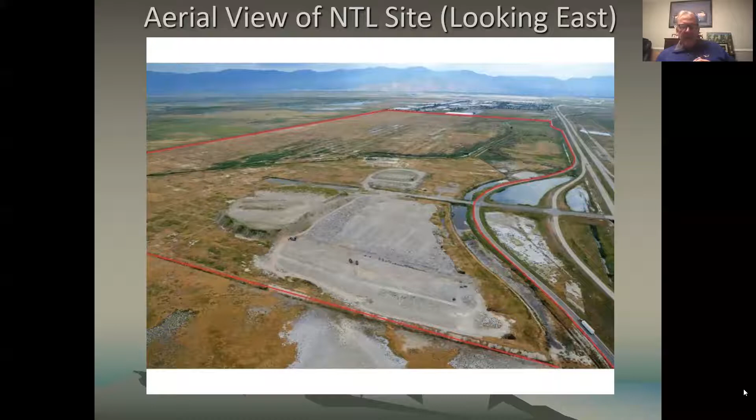To the left of that slide, which would be the northern part of the property, that red line aligns with 700 North. So that gives you a little bit of perspective of how large the landfill is and where it is. If you go to the next slide. Okay. As I mentioned before, the landfill was operated by Salt Lake City as a municipal waste landfill.

When you think about this landfill, how it operated, it was not like a landfill operates today where it's 50 feet high. This was what's called a trench landfill. So these were just trenches that were dug with a backhoe or a drag line. So they would dig down a certain amount of feet. When they got to that depth, they would then place the waste in the trench, and then they would fill it back with some of the soil that they had on top. So there was never a cap put on the landfill.

And if you look at this graph, you can see the areas in which the waste was placed. So area 1, which will coincide with our phase 1, was put in place in 1959 to 1963. That's when it operated. You can also see that the orientation of the cells in that area go north and south. And if you look at the area to the north of that, they go east and west. So you can see how the landfill was developed. It basically went from the east side of the landfill and worked its way across to the west, only to return to the northern portion, which is area 6, in the late 1970s to close out the landfill.

As we move from east to west, the waste gets deeper. The waste in area 1 is between 2 and 5 feet deep. When we get to area 5, the waste is in excess of 10 to 12 feet deep. So as you move across the landfill, the waste cells get a little deeper. And that's just a function of the way in which Salt Lake City operated, because as they went further along, they were looking for more capacity. So they dug those trenches a little bit lower. Okay. So now you have a sense of how the landfill was developed.

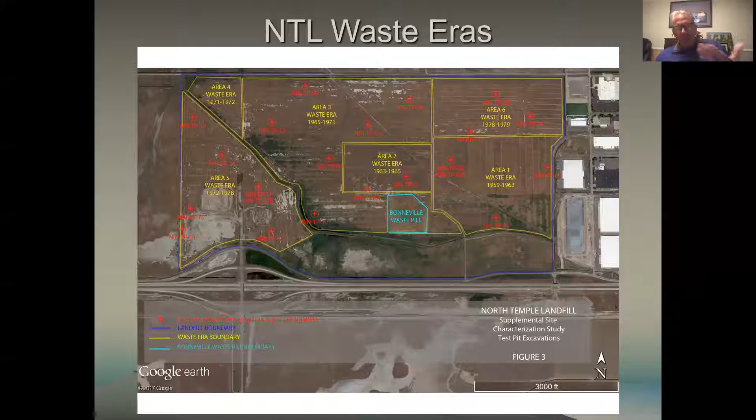And that's kind of the same situation that we're looking to do here as we move forward. It's basically consolidating this waste that we have across the entire landfill into a series of repositories that'll concentrate that waste on the North Temple landfill site. So if we move to the next slide, what we see here is what we refer to as phase 1. So as we move forward with the landfill, we're going to remediate it in phases. This is our phase 1 boundary. It's a total of 175 acres, but only 130 or so have any waste in them.

And if you see the southern portion of phase 1, there's a brown marker that goes across there and makes its way across the property. That's the Brighton Canal. That is an irrigation canal operated by Suburban Land Reserve. Its only function today is to bring water from well water out to the duck clubs. That has been turned off now for the last 9 months. That canal will be relocated or be closed down. So that will no longer be part of crossing the landfill.

In the phase 1 boundary, the cells that have waste are above that Brighton Canal. So if you look at that, you'll see that dark line that runs through the southern portion. Anything below that is no waste. The area above that is waste. And again, that area runs between 2 and 5 feet. Why we chose phase one to do first is for a couple of reasons.

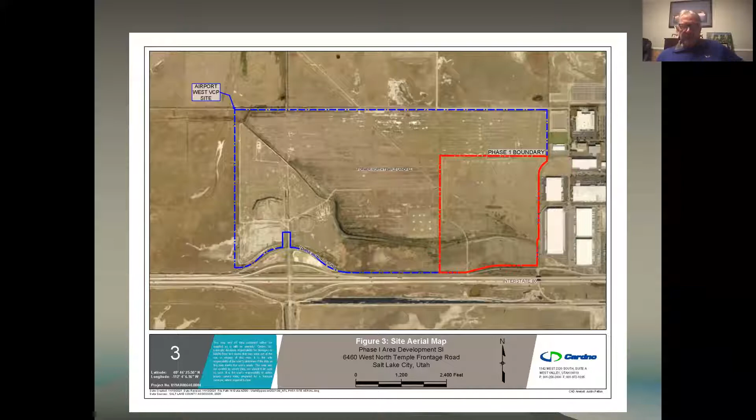It also allows us to start the development. And with a landfill of this size, we need to be able to develop and be able to monetize some of that land so that we can apply those funds to move across the landfill and remediating that landfill. So that's how phase one has been identified. And again, like I said to you before, it's about 175 acres. If you go to the next slide,

I've talked about the history where it came, and go back to this concept. Let me give a little more history for everybody here too. The landfill was operated under a lease with a local family, the Hogle family, by the city of Salt Lake City. In the mid-70s, Suburban Land Reserve, the LDS Church, received a land grant, a donation of a multitude of acres that encompassed the landfill. So there was, I believe, 2,000 acres that all surround the landfill that was donated to the LDS Church. The LDS Church basically inherited that landfill in that lease, but was not an active participant in the landfill operating.

When Salt Lake City decided to close the landfill, they closed it in 1978. And at that point in time, that area in the Northwest quadrant was really looked at as an area that was really not ripe for development. It was open area. With the development of the prison and the introduction of infrastructure into that area, then the land around that became back on people's radar screen, because now there was some reasonable economics if the prison was going to bring in this infrastructure, that these areas could be developed.

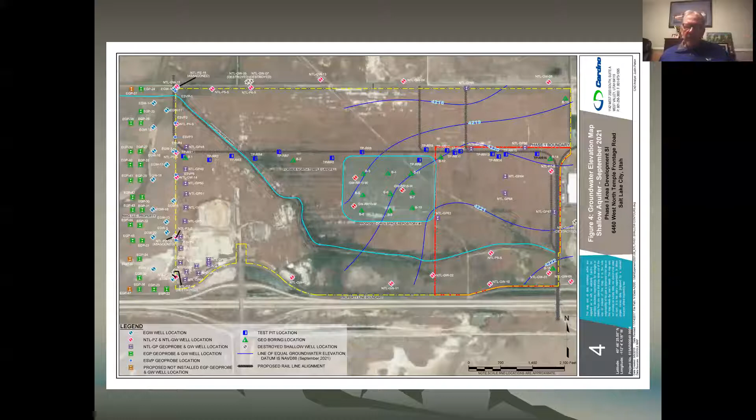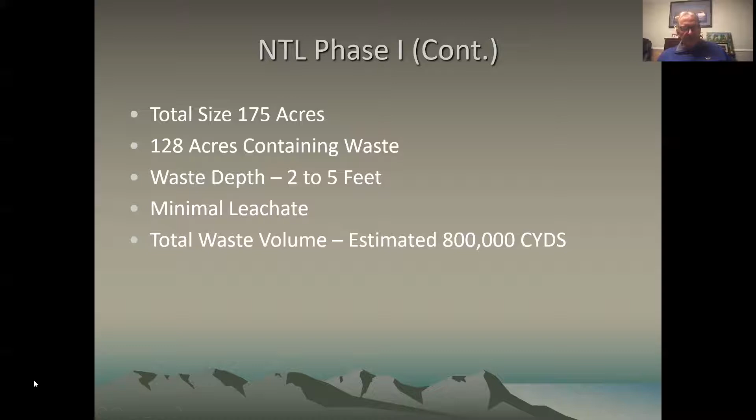If you go to the next slide, again, we're back to phase one, and it's 175 acres, maybe 128 contained waste, a relatively shallow amount of waste, very little leachate, and the total volume that we estimate in those 128 acres is about 800,000 yards. Even though it sounds like a large number, it's very manageable. We go to the next slide. What we'll be doing now is putting together what's called a remedial action plan. We're working with DEQ to put together a plan for how to go about doing this waste consolidation.

That plan will then be submitted to DEQ for initial comments. Once we have the initial comments, it'll then go out as a public document and for public comment. So what we hope to do, and I'll give you some timeframes, we hope to have the remedial action plan, which is referred to as a RAP, R-A-P, to them, the DEQ and Bill Reese's group, by the end of this year, the end of December.

They'll take a couple weeks to review it, make their comments or things that they don't think are clear, whatever the case may be. So we would hope that by the end of January, we would have a remedial action plan out for public comment. That public comment period is a 30-day public comment period. If there's questions or other things that need to be answered, that comment period can be extended through DEQ. What we would like to do is geared towards trying to have a remedial action plan approved so that we can start some of our process in the field sometime in late spring, early summer.

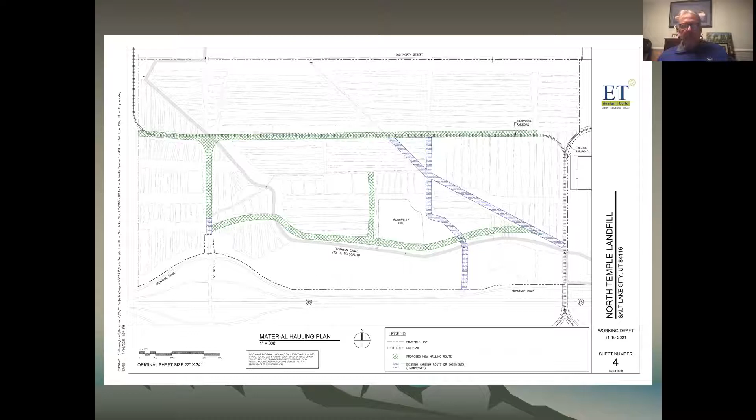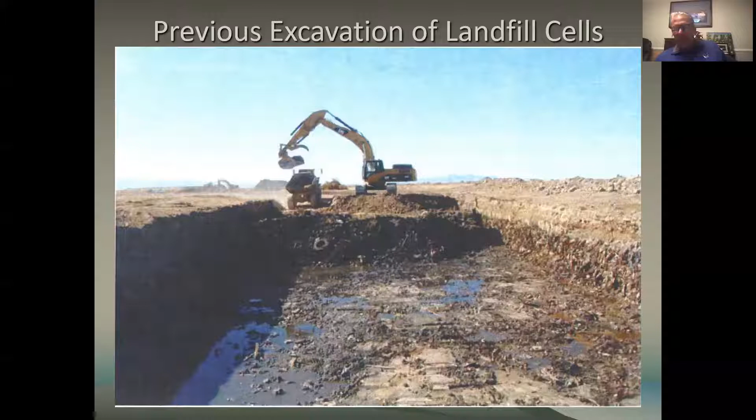You can see in this area here, there's very little liquid at the bottom of the cell. So that would be collected, pumped out of there, and stored. And then I'll walk you through what we're going to do in terms of evaporation and treatment in a later slide. But if you focus on the right-hand side, you can see the profile that I'm talking about. Cover material, which will be scraped off and put to the side to be reused. And then the solid waste and really decomposed solid waste underneath that. If you go to the next slide, I've tried to zoom in.

It's a little fuzzy, but maybe you can get a better sense of how the layers of soil work. On the top is your soil, nothing unique, just native soil. Then below that is your waste profile, the 2.5 to 3 feet of waste that's on the side of that slope. Again, this is not rocket science. It's consolidation of waste, but you have to build in a lot of process, safeguards, and those type of activities so that you make this as efficient as possible and least offensive while we're doing this.

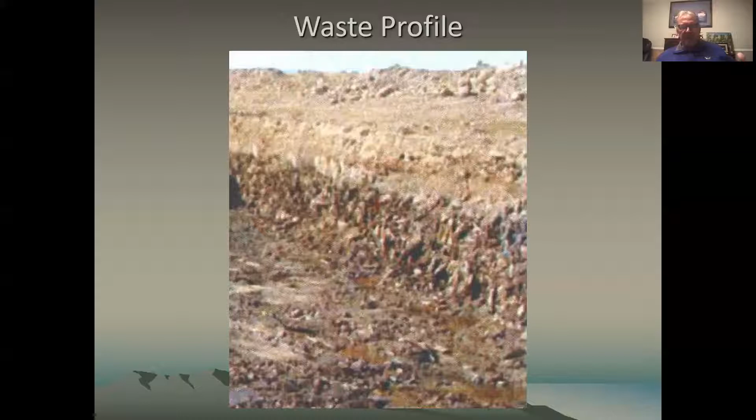If you go to the next slide, this is typically what you'd be looking at. You'd have an excavator, as we saw in the picture before, taking the cover off first, then taking out the MSW, municipal solid waste. And then if it's wet waste, we'll let it drain back into the cell, and then we'll pump out that leachate from there. At the back end of the cell, we'll be bringing new structural fill in, clean fill, probably a little bit of a layer of gravel at the bottom of the cell.

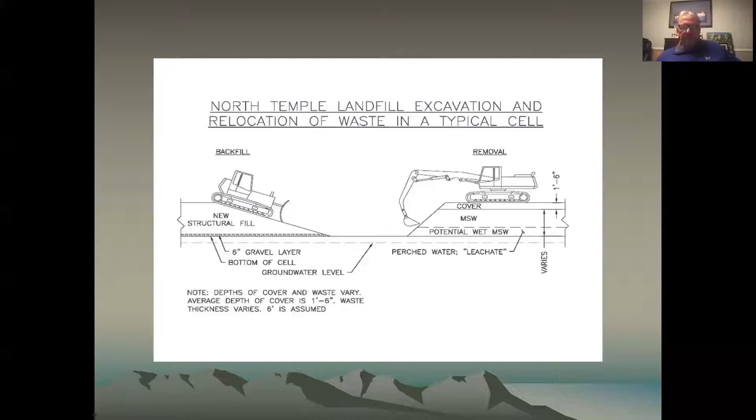And then as the process moves forward, the excavator and the haul trucks take the waste away, and the bulldozers and the haul trucks bring the material back. So you have a progression where you work your way down a typical cell. Okay. If you go to the next slide,

once we get into waste excavation, and this will all be chapters in the remedial action plan, and these will be things that DEQ reviews with us and approves. So one issue we have is waste removal. And that'll be all documented there. How do you pick the waste up? How do you move it? How do you put it in the truck?

We'll have an air monitoring plan. We'll have a leachate management plan. How do you collect the leachate from the bottom? How do you pump it? How do you store it? How do we go forward and evaporate it? And then how do we treat it?

Special waste, under this terminology, is things that are not going to go into the repository. So that would be a refrigerator, tires, asbestos tiles, or whatever the case may be. So we'll have roll-off containers; the engineering company that's working with us has done this before, they'll have roll-off containers. So at any point in time that we see some waste that's not municipal solid waste that's decomposed, that waste will go into a roll-off. If need be, it'll be tested, and then it'll be brought to the appropriate disposal facility.

The other operation on the site is waste transport. How do we move that material to the repository? And then the repository itself: how do we build that repository? How do we manage it on a day-to-day basis? And what does that cap look like? So those are all operations within the waste excavation that'll all be documented in the remedial action plan. We go to the next slide.

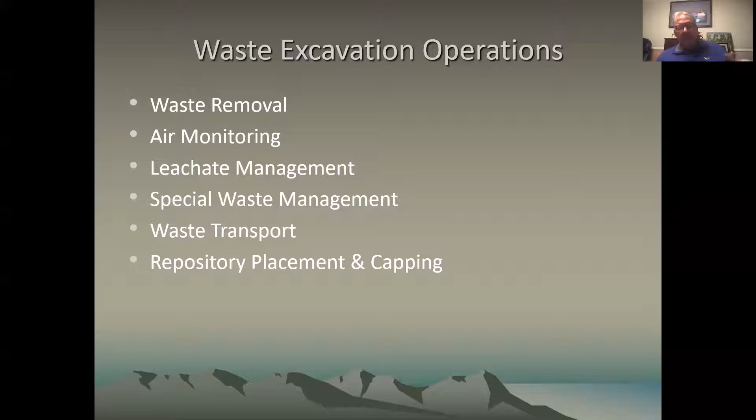As I mentioned before, one of our focuses is going to be odor and emission controls. We've already established a baseline: we flew the landfill with a drone detector that picks up methane and other indicator air quality issues. That looked very good, and it's basically representing what we've seen in the field. Not a lot of methane, not a lot of off gases. But once we open up the landfill, we want to make sure that stays.

So at the excavation, we'll have a PID meter, which will read various VOC emissions, and what we call a field olfactometer, which is gauged to actually try to identify an odor as you would do it with your own nose. So those will be at the trench, and we'll be monitoring as we go along. There'll be a dust control program as we're moving trucks back and forth, making sure that that's not an issue. And then we'll have odor control methods, and part of that is going to be ones that are actually sprayed around the working face. And the same thing at the repository.

Any exposed waste will be covered overnight. We'll typically use tarps for that. And when we're building out the repository, when we get to a level where we've put a couple lifts in, then we'll more than likely use cover material, and we'll build what's called an intermediate cover on top of that. That'll give us stability to go to the next lift, but it'll also minimize any vector and odor issues.

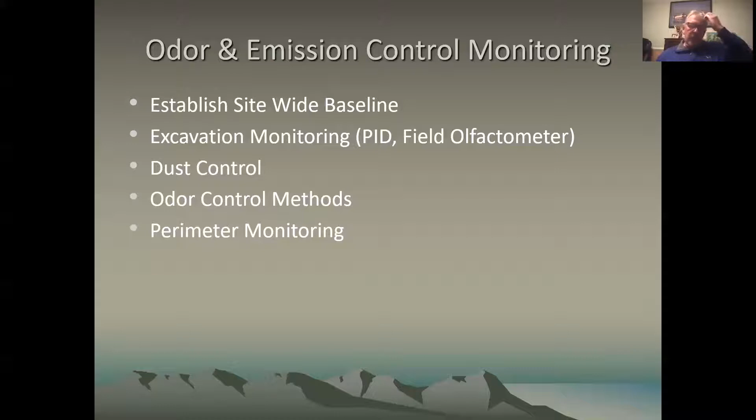Leachate is another issue that we have to address. At the bottom of these cells, like this bathtub that I talked about, not so much in phase one, but as we get to later phases, there'll be some leachate. We expect to collect some leachate here on the northern cells of phase one. We will be developing a leachate pond. We will take the leachate at the bottom of the cells and pump it to the leachate pond. In the leachate pond will be a holding area, and then that will go into an evaporation system that we've been working on for some time now to find the right mix.

And what I mean by that is most leachate evaporation systems that you see at any other landfill utilize the methane gas as a source of power to run that evaporator. We don't have enough methane at the site, and we don't have a source of natural gas at the site. So we're going to use a different evaporation system, what I'll show you in the next slide or two. But we expect to get between 90 and 95% reduction in the leachate by using this evaporation system that we've been able to work through.

Once we have that reduced volume, it will then be treated with activated carbon towers. And that's part of what we did in our pilot study, and I'll show that as well. Once that remaining leachate from the evaporation has been treated with activated carbon, we'll then transport that brine to a POTW, and we'll meet their standards. And we were able to do that in the pilot study when we did that 2 years ago. So I'll show you a little bit about that next. If you go to the next slide.

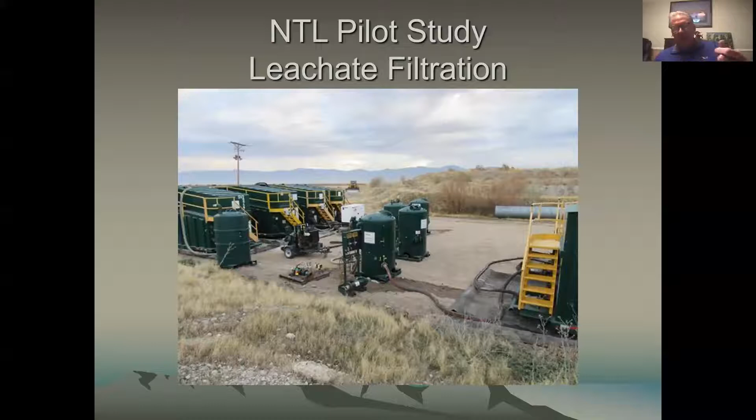If you go to the next slide, this is the evaporation system we'll be utilizing. That green tank there is the storage tank. So you would take leachate from the holding pond, pump it into the storage tank, and then it would go through this evaporator. If you think of this evaporator, it's really just thin sheets of plastic that allow the leachate to come in contact with the air.

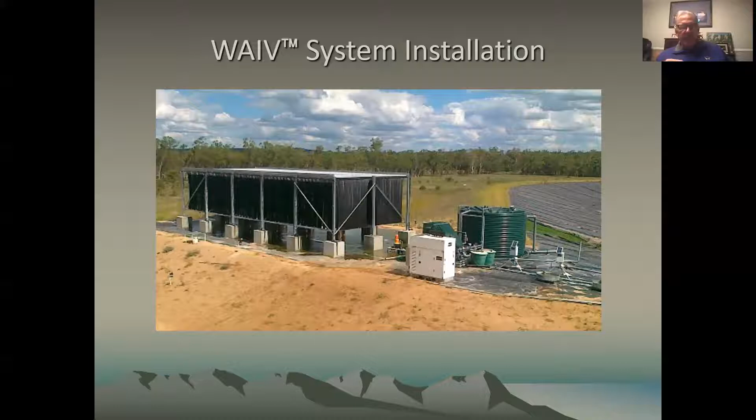Obviously in Utah, in Salt Lake City specifically, in the summer, we have a great setup for evaporation. And this system, without the use of methane gas to power it, has to be powered with electricity in terms of the fans, but this should give us that 90 to 95% reduction in the leachate. So this is a very encouraging technology that we'll utilize. And this technology can then be moved from location to location as we move into the subsequent phases of the landfill remediation. If you go to the next slide,

as I mentioned before, this is a 770 acre landfill. We've done 80, 90 test pits. We've not found anything. We've never found skull and crossbones, no drums, none of that kind of stuff, but it's a 770 acre landfill. So we need to prepare for finding things that we don't anticipate. We know we're going to find tires. They don't disintegrate. We've found them before. There'll be the occasional refrigerator or whatever the case may be. At other locations where we've done this, we've found asbestos materials in tiles that we take in and we dispose of correctly.

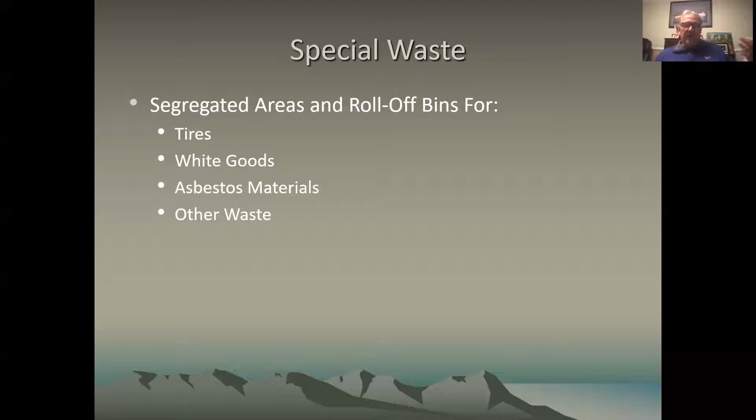So this will be something that we'll spend time on, and this will be something that we'll be working with DEQ on as well. We will also have a spotter out there. That'll be a third-party spotter working with us, making sure that as we go forward, anything that we see unusual in our excavation, we identify it, and if necessary, we collect it and then treat it. Okay, let's go next slide.

Gary, you went on mute there. I was trying to keep the cuckoo clocks away from bothering you guys.

First thing we do is we remove the cover material. We take the dry waste, we put it into haul vehicles. The wet waste is put on the edge of the trench. It's allowed to drain back into the excavated cell, where we then collect it. As I mentioned before, any exposed waste is covered with tarps on a daily basis. If you go to the next slide.

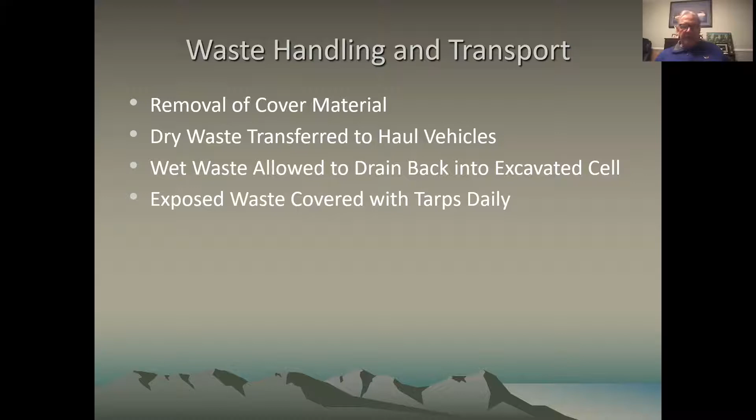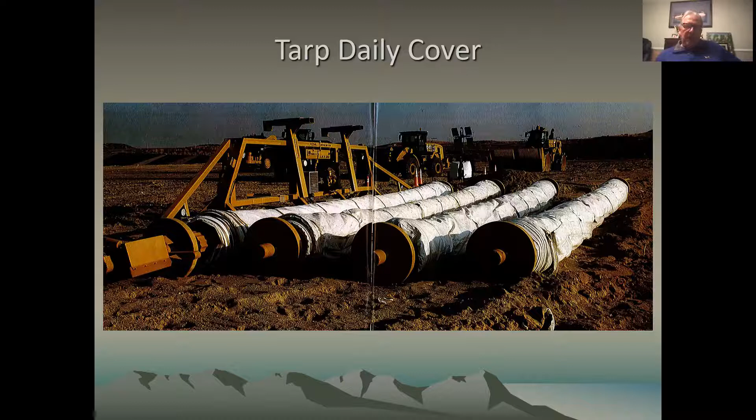Okay, these are some of the tarps I was mentioning before. You can see where they kind of roll out. And we have a machine like this that'll pull over the top of that, and that minimizes the odor and a lot of the vector control issues. Okay. You can go to the next slide.

We lost them again. No, you still got me. Okay. Kyle knows this. This is my wife's desire to have a cuckoo clock and a grandfather clock in the house. So we just went past an hour here. So we got some musical backgrounds.

It'll be something that is, I said, 35 acres, or 32 acres actually, maybe close to 18 to 19 feet in height, with a 4-to-1 slope. So it's a gentle slope on this. So this is not your typical landfill that you see that's 60, 70, 80 feet in height. But it is something that will blend in with the surrounding areas. Okay. Next slide, if you could.

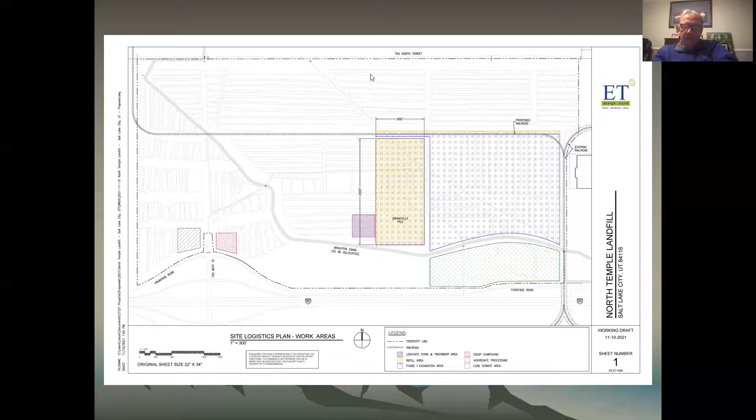Okay. The repository I mentioned before, about 32 acres. That's where we're going to place the waste. We'll do that in lifts. After a couple lifts, we'll actually put intermediate soil on top of it. That gives us another base that we can go on top of, gives us stability, and also minimizes any odors and vector issues. That's the intermediate cover. We'll have odor control, as I mentioned before, at the location of the repository. And once the repository is filled, we'll have a final cap.

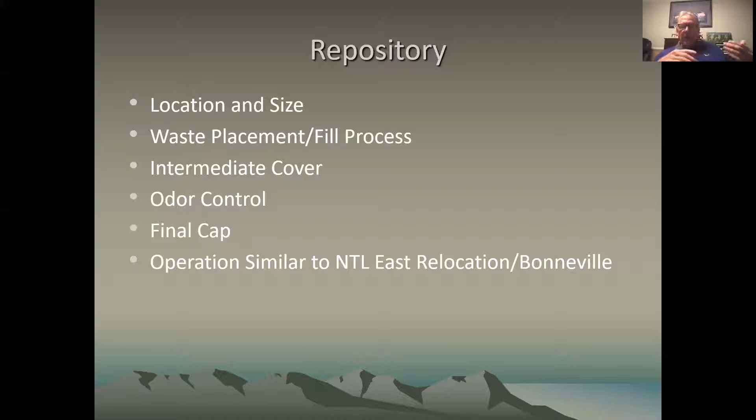Now, the operation of the repository is similar to what was done for the relocation from NTL East with Bonneville, but this will be a much more improved cap. If you go to the next slide, the cap will look like a current landfill cap. So you'll have a geotechnical membrane on that. You'll have areas for collecting the gas beneath the membrane. You'll have a drainage layer. You'll have 2 to 3 feet of vegetative layer on top of that.

So as you have rainfall come down into that vegetative layer, it'll get on top of the geotextile. It'll go into the drainage layer. You'll have a stormwater prevention system on that. The LLDPE liner will prevent any additional percolation into the waste and minimize any leachate. And then if we do get any gas from this relocation, we'll be able to collect that in the perforated pipes that are built just underneath the liner.

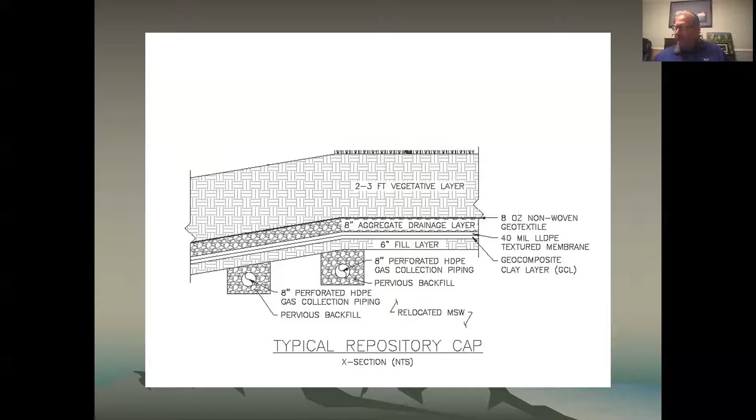This is a much greater improvement from what was done on the Bonneville pile or anything that was done at NTL. This is basically a current modern landfill cap that we'll be placing on this new repository. Okay. Go to the next slide.

With the remedial action plan, we have to have a series of plans that are part of the RAP. We'll have a health and safety plan, that's your HASP. We have the stormwater pollution prevention plan. You have a special waste handling plan. You have the community air monitoring plan.

And then one of the things that I've talked to DEQ about is, as I mentioned before, they'll be on site on a regular basis. We want to learn from them, take our experience here and make sure that we refine that so we can move on to later phases and incorporate that.

So what we'll be doing is we'll have weekly meetings on site with DEQ, and we'll have weekly reports that'll be available to them as well. So we'll monitor how much waste we're able to move. We'll monitor any concerns we have. We'll monitor any kind of work stoppages. We'll monitor the amount of leachate that we're collecting, that we're running through the evaporator. So all that will be documented as we move forward.

Next slide, if you wouldn't mind. Okay, so that's pretty much, again, the presentation. I hope I didn't take too long for that. I hope it gave you a good sense of what we're trying to do. But at this point in time, Kyle or Robert, if you want to answer any other questions, that'd be great. So I've tried to answer some of the questions as they come in on chat. I don't know if you still have further follow-up questions.